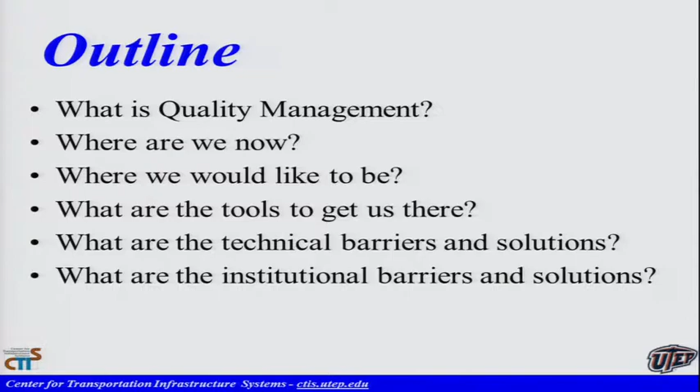Because in our business, they don't teach you in the university how to deal with the politics of it. But that's one of the joys of our job, that we have to consider that.

With the cartoon, I'm going to talk about bases because I'm a geotechnical engineer, but I'll refer to other materials too. Bases are a reasonably value-added material, and we're going to put it into context.

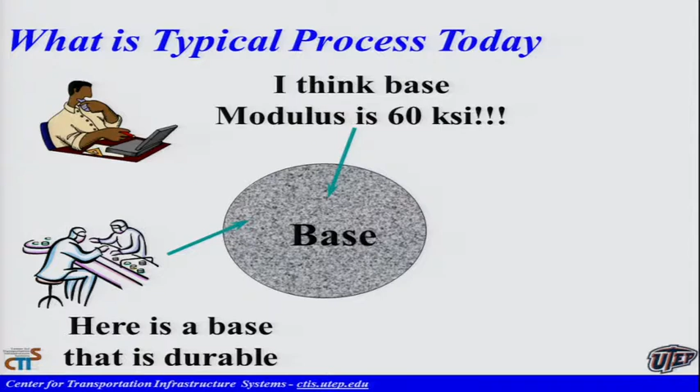So what do we do right now? There is a designer sitting in an office, at least in Texas, at least 10 miles away from everybody else. They put the designers in a separate building, and he dreams up that he wants to design a pavement with a modulus of, let's say, 60 KSI. Doesn't matter. And then he conveys that to the laboratory. The laboratory comes up with a material that is essentially durable and constructible. We are looking at the moisture density curve, and you look at the gradation, right? Nothing to do with what the designer did.

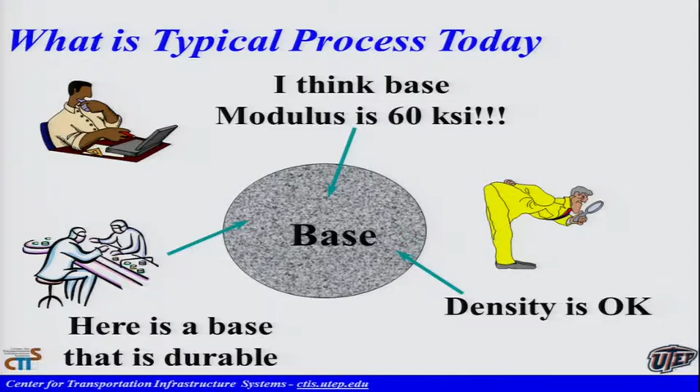And then we go to the field, and what do we do? The inspector is looking at the density. So there is basically no communication between these three guys. Everybody does their job to perfection, but they are not related to performance directly.

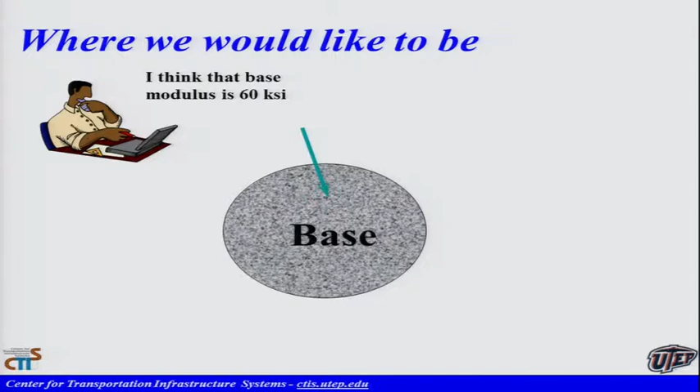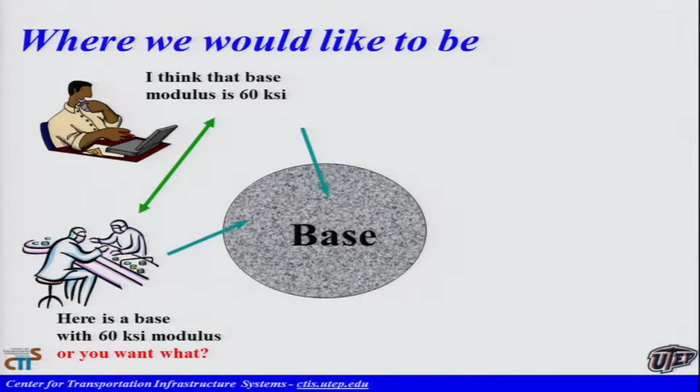So what I would like to do is take it to a place where the designer would assume that's 60 KSI, and then the lab manager would say, okay, this is a material with 60 KSI, or laugh in the face of the designer and say, what do you want? And then what you would like to do is have the inspector make sure that you got that 60 KSI. I'm using a base as an example, but it's not unique to the base.

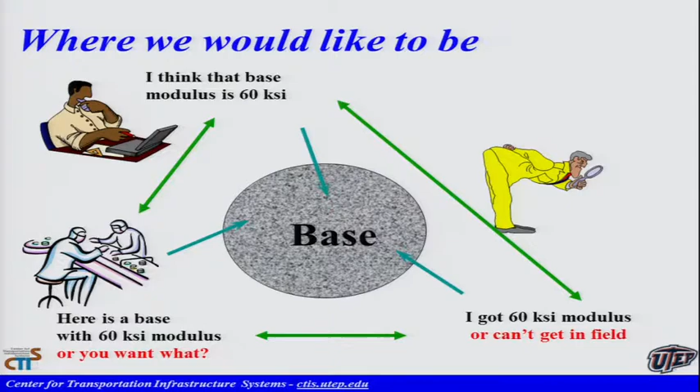Look at the concrete, what are we looking at? A specimen that we put on top of water for 28 days, and we are paying based on that. After the concrete is poured, nobody cares about how good the finishing is, nobody cares about how you cured it. Same thing with the asphalt, all of them. We have this issue that a lot of other industries do not have.

So when we say the big picture for quality management, the first thing we want to do is let the people who are in charge of construction quality, the design process, and material selection talk to each other in a coherent manner, give feedback to each other, and then make sure that we get the performance.

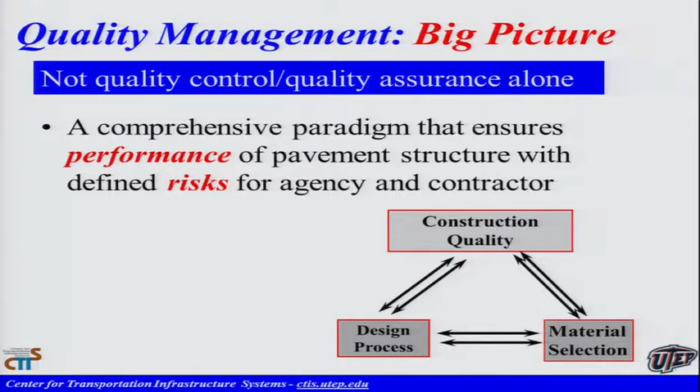Performance, now you define what performance you want it to be, whatever it is you're achieving, with a certain amount of risk. We know that this is not ceramics that costs $500 an ounce. There's some variability, so whenever there's variability, there is a risk. There is a risk to the owner, there is a risk to the contractor, both of them.

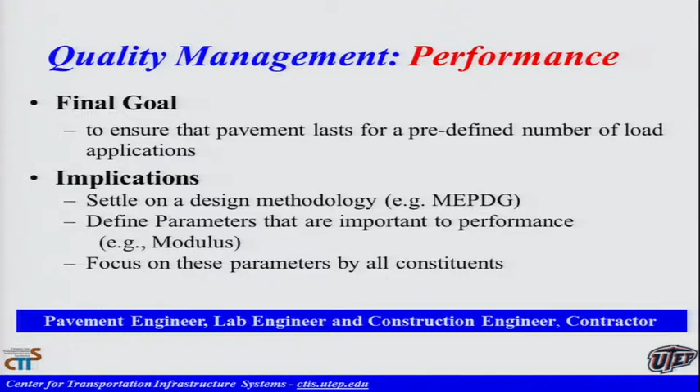So the final goal is to have a pavement that lasts, for instance, to a predefined number of load applications. So in order to do that, the first thing we have to do is settle on a design, for better or for worse, wherever we are right now. This is what we're going to follow to define the performance, define the parameters that are important, and then focus on those parameters throughout.

So basically, you're involving the pavement engineers, lab engineers, construction engineers, and the contractor. Everybody's working toward the same goal. There are some risks here, so we need to manage this risk.

Well, the agency, the DOT, deserves a high quality material pavement that they're paying for. At the same time, the contractor deserves a reasonable profit. So we have to share these two. Basically, we're trying to minimize the rehabilitation and maintenance, and prolong the pavement life.

Now, there are a lot of things that impact it. The main important thing is the type of contract and the risk management. When you have design, build, maintain, the contractor has to pay a lot of attention because they own that piece of property for 50 years. You better initially build it correctly so you don't have to spend a lot of money later.

But when we go to traditional design-bid-build, the moment you put the density gauge down and say it's good, you own it. So now the owner agency has the risk.

And the worst one of all, and I've seen a few of them, is design-build. You give the contractor the freedom of designing and building it, but not maintaining it.

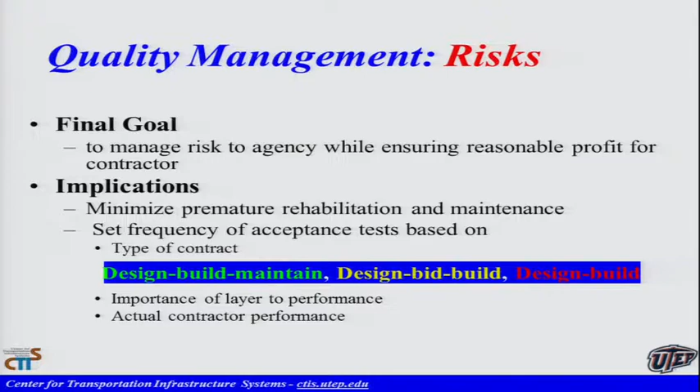And then there's the importance of the layer. If you're just putting a seal coat on top of the base, do you really want to do the same amount of quality control as when you bury that base under 10 inches of asphalt? Right now, all the specifications do the same thing.

And the other thing is, I don't know how to bring it in, but it's legalese - I'm not a lawyer - you know, the performance. There are some contractors that are good, and some contractors that are very good. We don't have bad contractors, but you know what I'm saying - there's a different level of goodness.

And somehow if we can bring that into the equation, we can look at how often to do the inspection and so on and so forth.

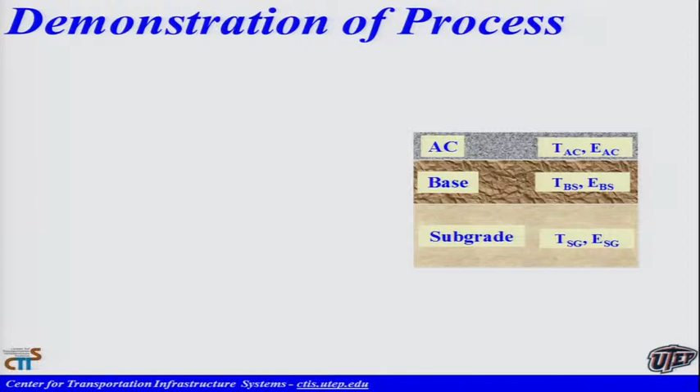So I'll just demonstrate the process. We have a 3-layer pavement, not common - asphalt, base, and subgrade. We're trying to build from the base down. If you look at the structural impact, as the thickness and type of materials you're using change, one layer and the other become predominant.

If you have a thin layer of asphalt, the base is predominant. If you have a thick layer of asphalt, the asphalt itself is important. One of the things we have done is come up with a structural impact chart.

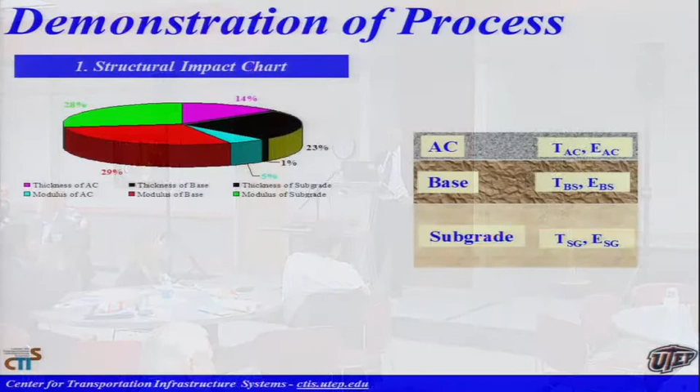There are basically 2 thicknesses and 3 moduli. Which one of these 5 is most important here? In this case, the modulus of the base and the modulus of the subgrade is controlling, because it's a thin rural road, for instance.

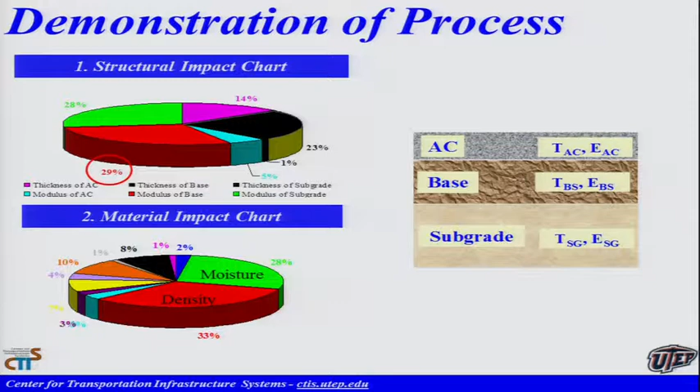Now, when you define what material, you can define what parameter of it. We have a constitutive model - we understand how these work. We know that density and moisture are important, but there are a lot of other parameters that come in, so you can focus on that.

So for the pre-construction phase, first you identify and make sure the design is appropriate. Then, based on the importance of this and the variability that we know devices have, and the natural variability a conscientious contractor would have - there's no way they can make it perfect - we can come up with a sampling plan, not just a piece of paper that states a minimum sample size.

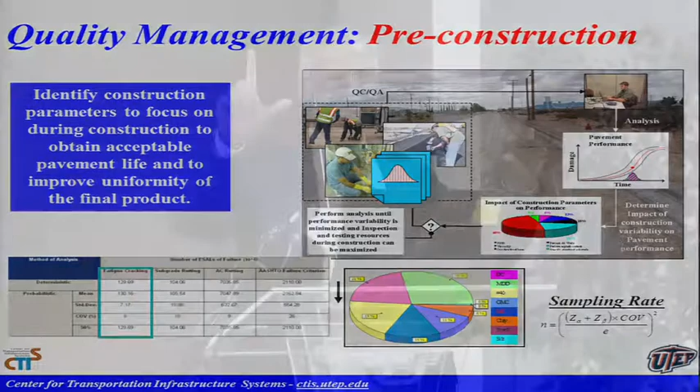For this project, this is the sampling that you require. And this is the one that we have done for Texas Department of Transportation. Basically, it tells you how to sample and which one to sample.

Why do we do this? Because if you go even to the bridge side, when they're building it, somebody is pouring concrete on the bridge, and there is earthwork right next to it. If you look at it, there are 6 inspectors looking at the concrete, while on the embankment, they are putting in 3 foot layers of soil and compacting it by going over it once and building it up. There's no inspector over there. It may show up twice a day, just doing one sample. And then we spend millions and millions of dollars to get rid of that bump at the end of the bridge. So if you take 2 of those 6 concrete inspectors and put them on the earthwork, I guarantee the concrete would not suffer, but you're going to have a better quality road.

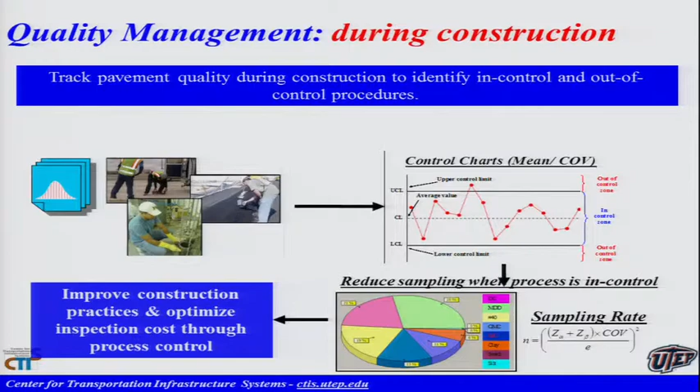Thank you. Okay. So during construction, we are advocating a dynamic quality control. If everything is uniform and according to specifications, and the contractor shows he can give a uniform product, by all means reward him with less testing. If they cannot have process control, they keep increasing the number of samples. It reaches a point that is not beneficial. They need to stop the work and figure out how to bring it under control.

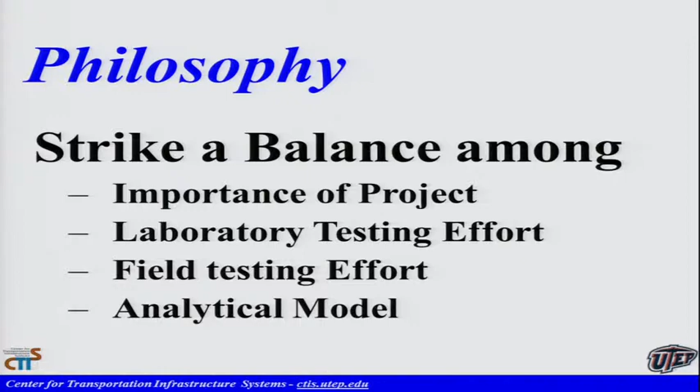Okay, that's what we're doing. So basically, we are trying to find a balance based on the importance of the project. We don't want as much emphasis on a secondary road as on an Interstate 40 going through town. Laboratory testing, field testing, and analytical models, we have to balance these. You cannot have one being more perfect than the other.

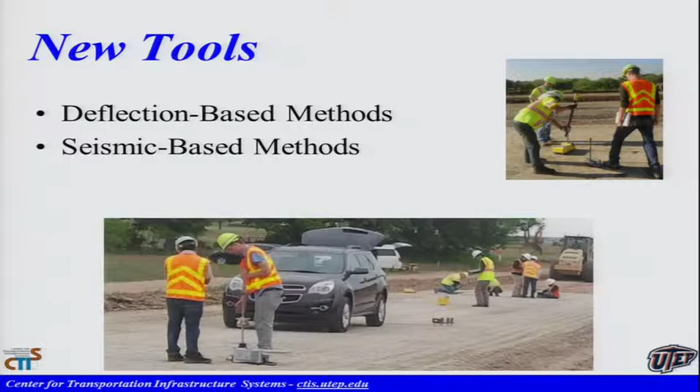Some of the new tools, and not so new tools, but they're still new because very few DOTs have adopted them: deflection-based methods and seismic-based methods. These are the elusive replacements for the nuclear density gauge. Everybody talks about it, and so far the only one who has really done it is Indiana DOT. Indiana DOT doesn't have a nuclear density gauge. So they went all the way to do it.

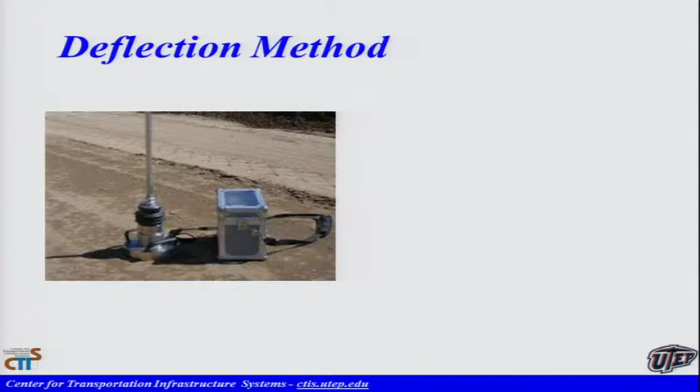What are these deflection methods? Basically, you drop a weight on top of the material when its compaction is over, like a dynamic plate load test. You assume the pavement system is one layer, and you get a modulus. So now we are getting a modulus instead of density or moisture content. We say moisture and density definitely impact the modulus, but you design for modulus, so why don't you measure the modulus?

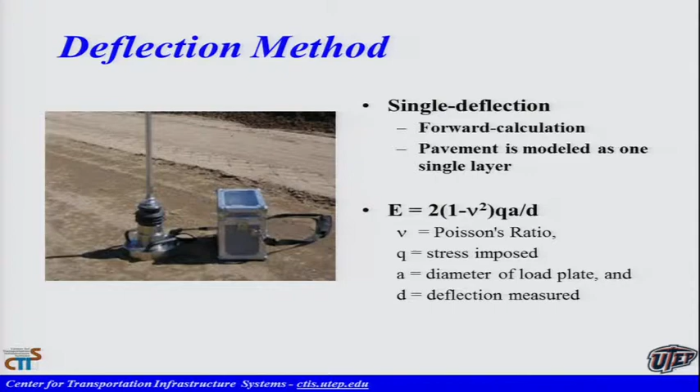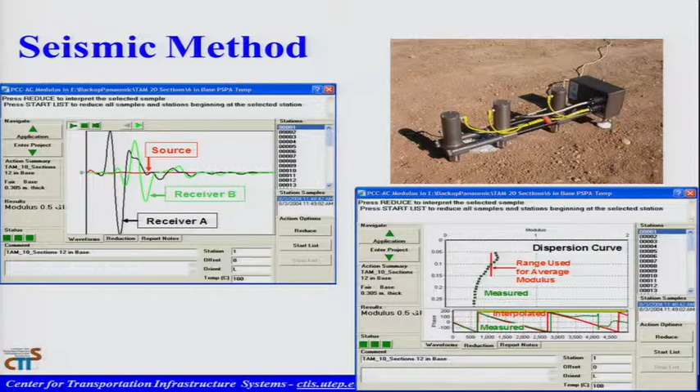Seismic methods are basically based on wave propagation. You try to find how fast the waves propagate between the sensors, and this is a source, and based on that you can get a modulus. The good thing about seismic is that you can get layer-specific information, and with laboratory testing you don't need a transfer function. The deflection method is good too, it's just that you get the system response, so you cannot delineate the subgrade from the rest.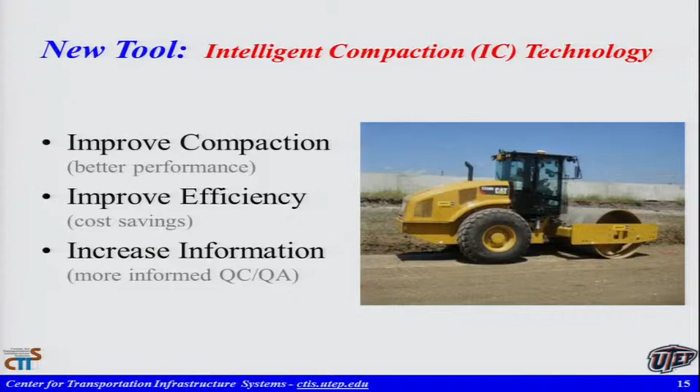Intelligent compaction, I guess I'm out of line over here with OU being one of the gurus of intelligent compaction. It's an extremely good process control. You just know how much variability you have, and so on. That's another thing to consider.

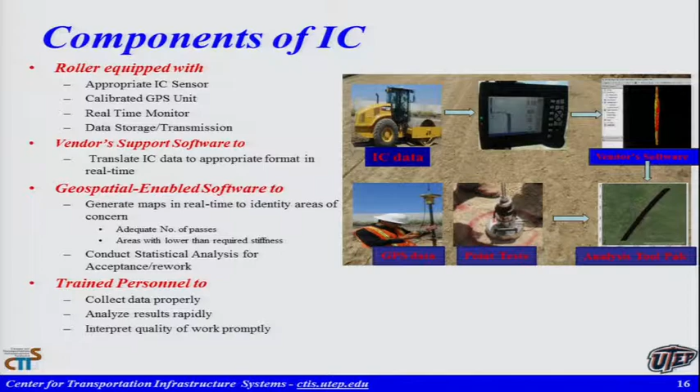I'm not going to dwell on this one. The component of IC is basically a GPS unit and a sensor on a roller that measures the stiffness almost continuously as you drive, for every pass. Sometimes we say it gives too much information, so right now data management is a big issue. But other than that, basically you cover every inch of the material.

I would like to show you an example of some of these things I was talking about. This is a site in Dublin, Texas, home of the best chicken fried steak in the state of Texas. There is one restaurant and there are two items on the menu, either the chicken fried steak or fried chicken.

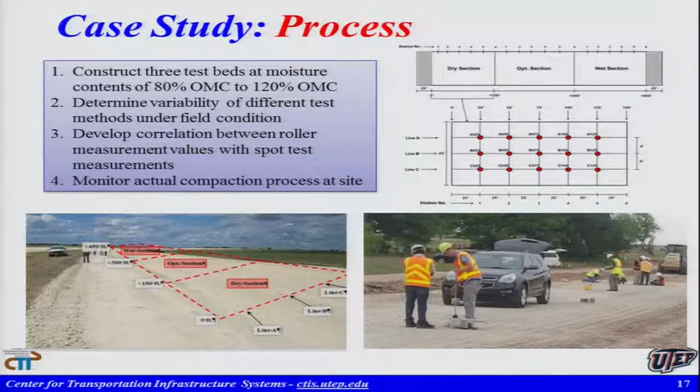If you look over there, there are 450 feet, we have around 45 data points where we did everything. It's crowded - you see the LWD lightweight deflectometer, seismic, NDG, and a couple other pieces of equipment I'm not going to discuss to cover it. We used intelligent compaction to compact all 3 sections, so we have a record of what's happening. This is the sensor measuring.

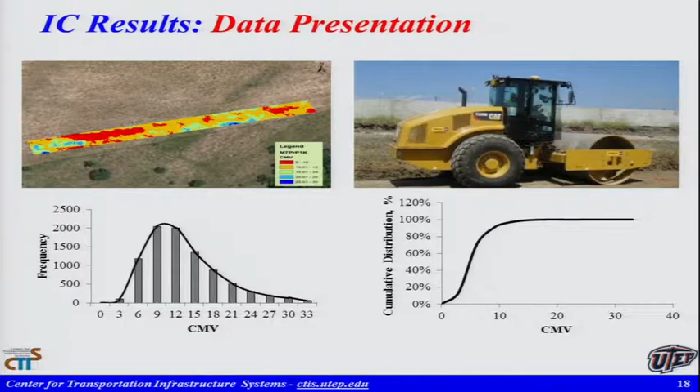We usually show the data like this - CMV is the value we use, the stiffness. The bigger or larger, the stiffer the system. When we map it, it's pretty, but we don't know what to do with it. So we look at the distribution of that value, then take it a step further to the cumulative distribution. That's more engineering than those pictures. I love those pictures, but we cannot do engineering with them.

So, impact of the moisture content. Here you see dry of optimum. The red is the 3rd pass, yellow is the 6th pass, and green is the 9th pass. You see that gradually we're getting better, so it took 9 passes to get all the points passing density. Our goal is to pass density - every point I show you passes density.

Now if I put it at the optimum, you see this is again the 3rd pass, with yellow and green on top of that. You see it's more efficient. As a contractor, I saved 3 passes - by 6 passes I got what I got dry with 9 passes, pretty much.

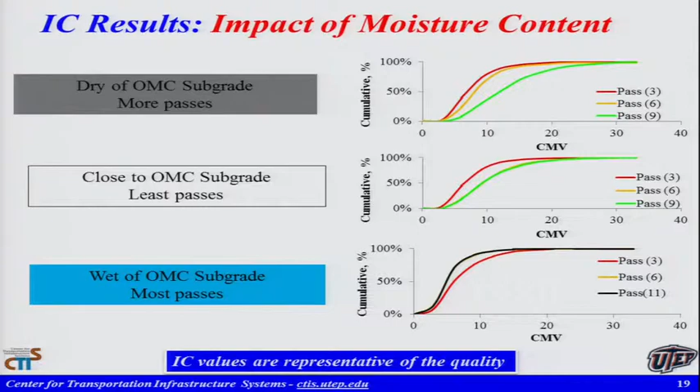Then we look at it when putting it wet. The red one was 3 passes, and the black one is 11 passes - we don't have any black. I'm going the other way, basically just shoving the material back and forth to make all of them pass density. So this shows the impact of moisture content. Again, every single one of them would pass - you would buy every single one of these three data points.

So the other thing is the definition of quality. We want to buy 1 layer at a time, right? We don't want to buy the whole system. When you have a roller, you're just vibrating 6-7 feet of soil - so you're buying the whole system. We want to buy 12 inches at a time.

So one thing we started looking at is the existing subgrade. We map it, then come and map it again with a 12-inch lift. We say, contractor, go ahead and give us another 12 inches of embankment. And this is what happened. If I want to buy these two, one way is to subtract them from each other - this was the stiffness before, this was the stiffness after. We're not very ambitious - all we want is the same quality as the layer below.

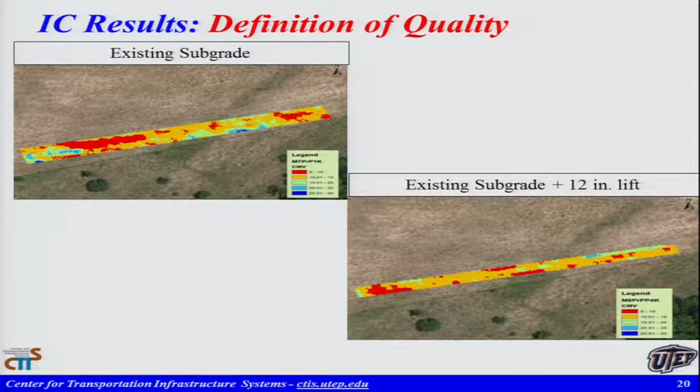As you go along, this shows dry of OMC after the number of passes. You see the distribution of the mapping before I put the 12 inches, then pass 9, or pass 11 is the last pass we collected. You see that? I get what I had below, now I'm getting it as well.

When I put it at the optimum, I'm getting a slightly better material. And when I'm putting wet, as I showed you, I'm going the opposite direction.

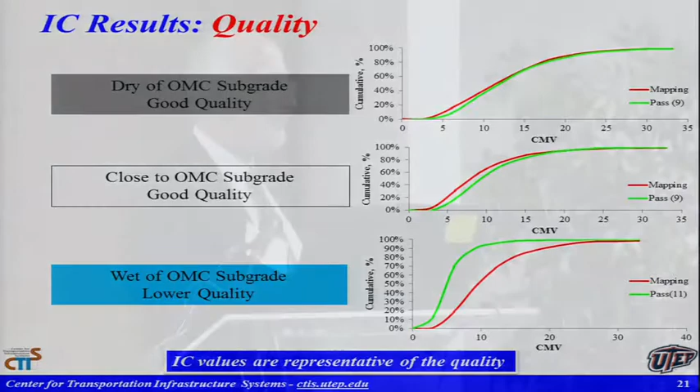When you look at it, lesson number one is that whatever you start as the first layer, you keep propagating up. So if you spend a couple of hours and make the first layer uniform and stiff, the rest of the pavement will build itself with much less effort.

Some of the specifications we have say whatever I have, I'm just going to build from then on. Maybe we need to reevaluate - if you build the first layer properly, the rest of it takes less effort and you get the quality and uniformity. That may be more effort for the contractors, but at the end, you'll be amazed if you go to the design, build, maintain stage - you see how many of them spend hours and hours on the first layer. They figure it out.

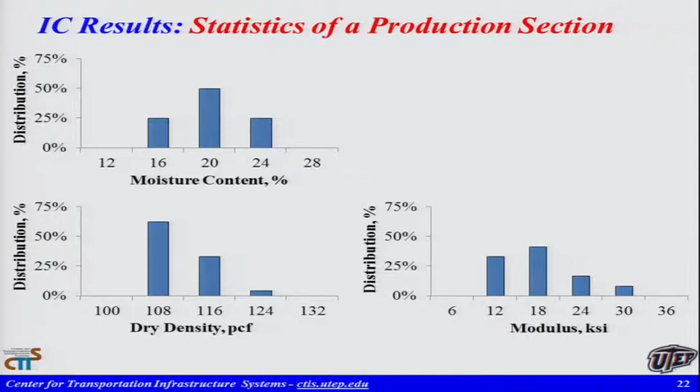So are you surprised that the modulus changes between 12 and 30? This is the heartburn of a lot of people using the modulus-based specification. It varies too much, because the other parameters are varying as well.

Some of the technical issues we are working on right now are what modulus should be used, what target modulus. With density, we run a Proctor test, arbitrarily get a density, and we say okay, I want that in the field. We went back and never figured out why 25 drops from 18 inches is the golden number you have to get. Now we can do it from laboratory testing, figure out how to prepare and what state.

And the other option is you can do the field test strip. The test strip is time consuming, so that's an issue we are working on. One way we did it is just map what layer you have, finish the next layer, map it, subtract it. If it's equal, you are good to go.

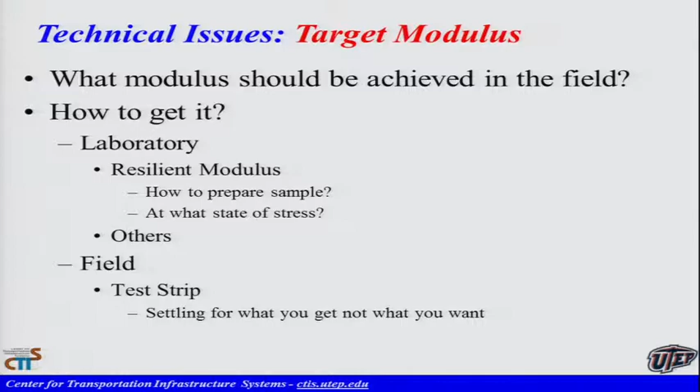I want to show you this moisture density curve, maximum dry density, optimal moisture content. And this is the same specimens where we are measuring the moduli, the red one.

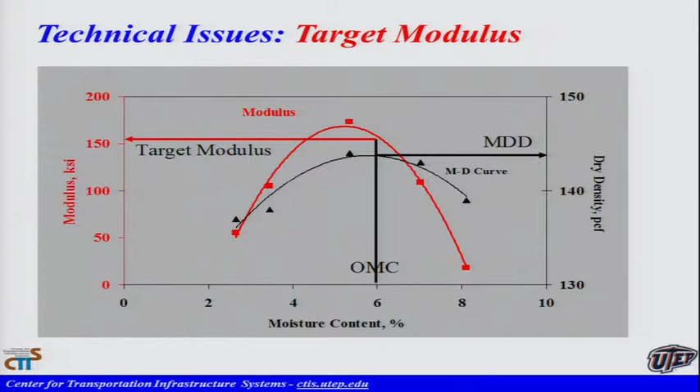So if you look at it, if I go plus minus 2%, I would get around 6% difference in the density, but I get 300% difference in the modulus. So that's why you have a much bigger impact on the modulus than you have on the density.

The other issue is the drying. As the specimen gets drier, the modulus goes up. And as soon as it starts soaking, it's just going to go down.

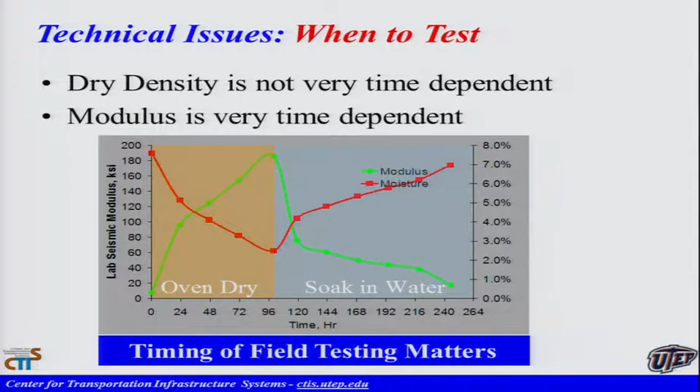But let's focus on this one. If I'm a contractor doing a modulus specification, all I have to do is wait to let the material dry. So institutionally, we have to control how many hours or days after compaction you have to accept it.

With the density, you can go dry density - you can finish it on Friday and test it on Tuesday, doesn't matter. With the modulus, most probably, if you finish it on Friday and wait till Tuesday, it's gonna pass, especially in the hot climates we are in.

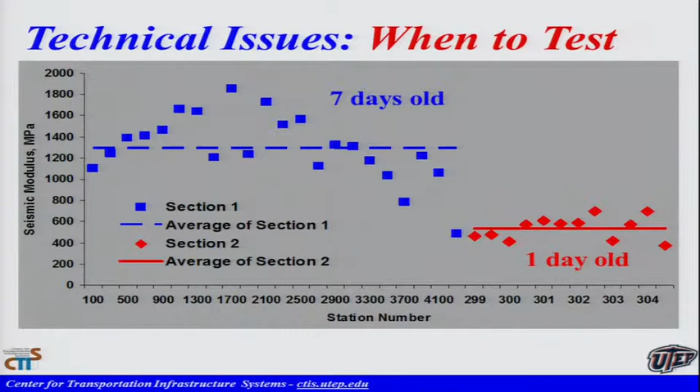This shows the effect - section 1 and section 2 are the same one. This is 7 days old, this is 1 day old. You can see the difference in the modulus because of the drying of the specimen.

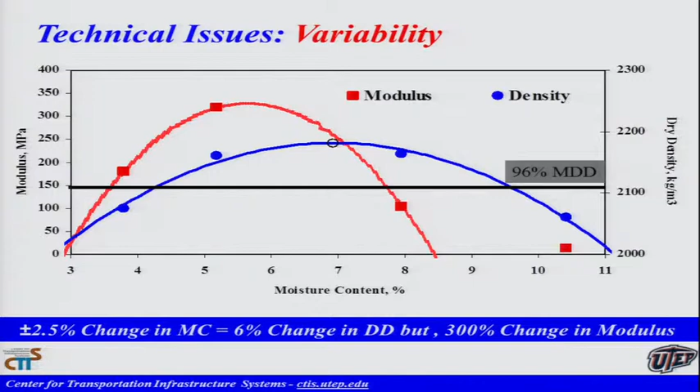So these are some of the institutional issues. Variability again - you see 2.5%, 6% in dry density, but 300% change in modulus. Some of the institutional manpower issues follow from this.

How do you interpret this? You're saying the pavement is the same, but the modulus changes because of drying. Because it dries - that's how we make brick, in the extreme. We make a really wet mud, and then we put it in the oven.

So basically what you're saying is that you should test within 24 hours. Yeah, 48 hours - usually that's not a problem because the contractor is anxious to put the other layer. If you're accepting, they cannot put the next layer until you accept the layer.

Contractors do not like to wait, but that's hypothetical - I'm just trying to understand how to parse and make a decision on this. Again, you control it: within so many hours or within so much moisture, you have to do it.

We just finished the NCHRP project on this. So we have a national specification coming up dealing with this issue. The manpower is always the issue - we are trying to do more and more with less and less inspectors.

But if you are trying to save 5%, why don't we just shoot for 8% and take 3% of that and put it into the quality control? We achieve that 5% by spending a little bit more.

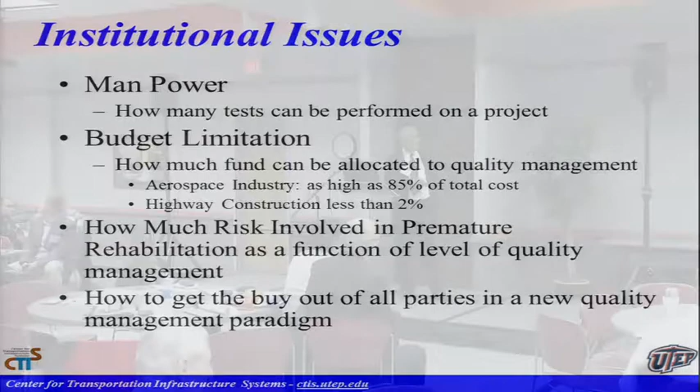We have to look at the cost benefit - you don't have premature rehabilitation or unintentional reconstruction because of the variability that we have. If you minimize potholes, if the whole thing goes away at the same time, you save a lot of money.

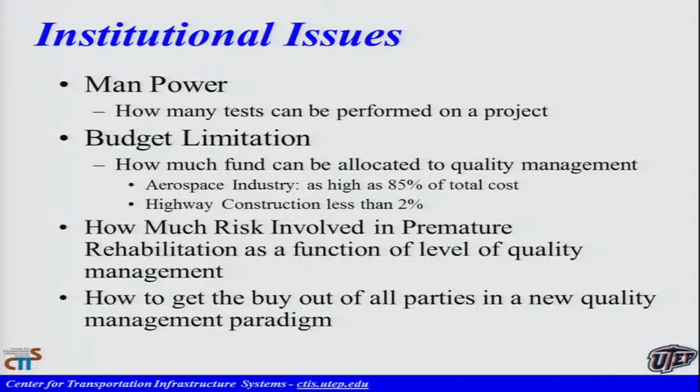And then to get the buy-in of everybody - AGC has to buy it out, the DOT has to buy it out, and the technical community, ASTM, and things like that. So we need a partnership amongst all that to see the benefit of this new technology, thinking a little bit more long term than just what's going to happen to my profit on the next project.

And that is happening. So I'll leave you with this one - this is NCHRP project 10-65. You're talking about the risk to buyers and sellers, and you see these are the sensitivities: 86%, 64%, and 44% for density.

So density is not a good indication of the quality. This is independent work - these are intentional defects, ARA was the contractor. They asked the contractor to intentionally screw up the construction, and the density only found 44% of it.

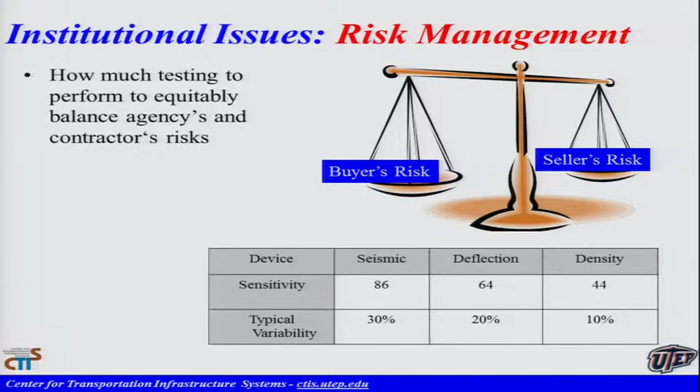But if you look at the variability, it's high too in the modulus, much higher than in the density. So automatically we start blaming the equipment - no, it's not the equipment, it's the way we build it and the material. So we have to consider that.

Anyway, I don't want to take too much time over here - I know I've gone over. Basically, this is a concept. There are a lot of challenges, but it's by far better than what we are doing right now in terms of getting more uniform and higher quality. There is a growing pain, but the contractors and the owners need to share this pain to get there.